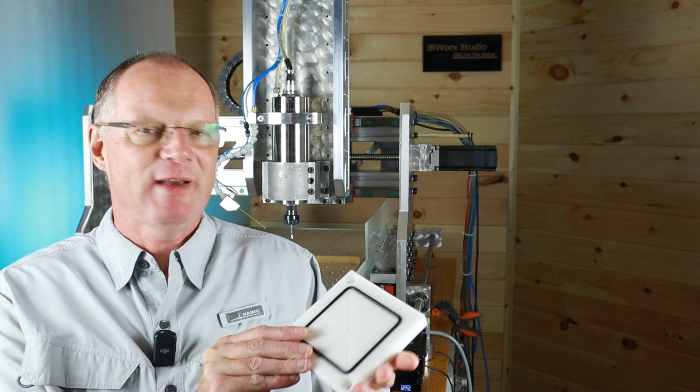I will make this vacuum pod today, and I'll show you how I make the CAM feature, and then on the machine I'll also show you how that looks. For example, we're going to make the bore, and I'll show you how the bore looks when we route it on the machine.

The plate is made of POM or Acetal, also called Delrin, and it machines very well if you use an O-flute bit. There are two different tools I use, and I'll leave you the links in the description.

Next, I have three really awesome tips. One, I'm going to show you how you can synchronize your view cube with your setup, so you don't have to fight that all the time. Second, I will show you how Fusion 360 can track the stock throughout your setups. And third, during simulation you never see a tool holder because there is no ER20 tool holder for our spindle in Fusion 360. But we can make one, and then it will notice when there is a collision, or it can notify you before you make a collision. Okay, let's get started.

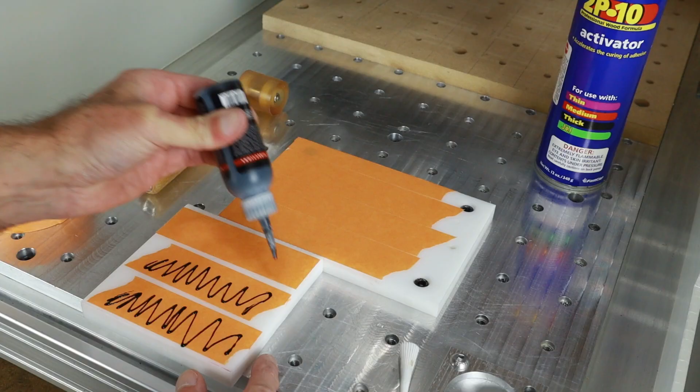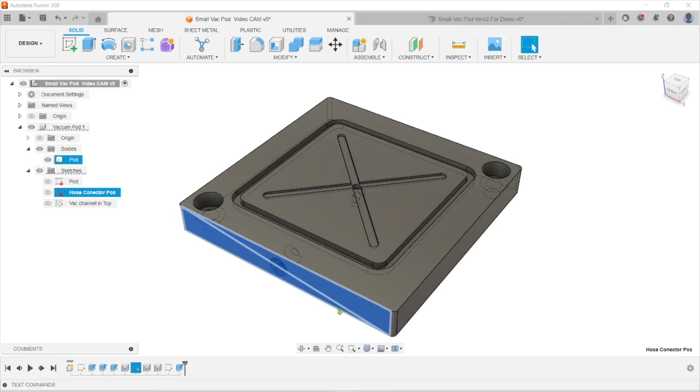Let's have a quick look at the model. So we just have one body, and then there's the vacuum pod itself, the drawing of that, or a sketch of that. Then the feature for the hose right here, which actually I'm not going to make in this CAM.

This is something I'm going to drill by hand. And then the vacuum channel itself right here. Then there's a center hole that you see here, and that center hole is also a portion of the CAM.

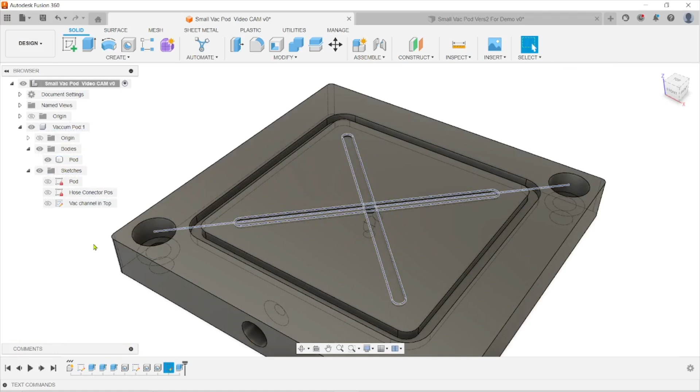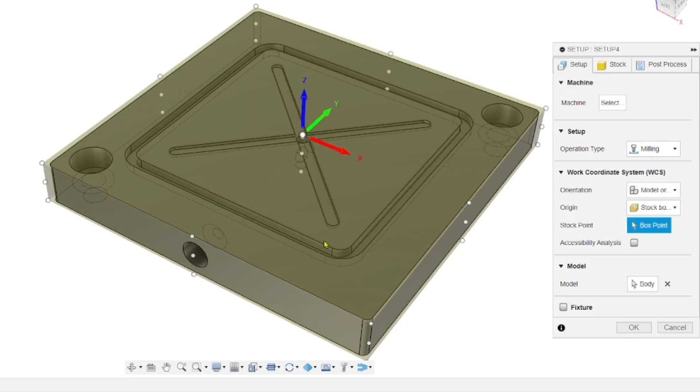Okay, next we need to go from design to manufacture. Setup, new setup. Default is that we have here the XYZ in the origin, in the center. And I like to place it at the bottom because that is where I zero out on the table. I don't zero out on the top of the part.

So the first challenge will be to put the coordinate system into the work coordinate system here, into the right place. So we have to use a view cube, turn the whole thing around, and then we'll see that we get it into the left-hand corner right here, the lower left-hand corner, this one.

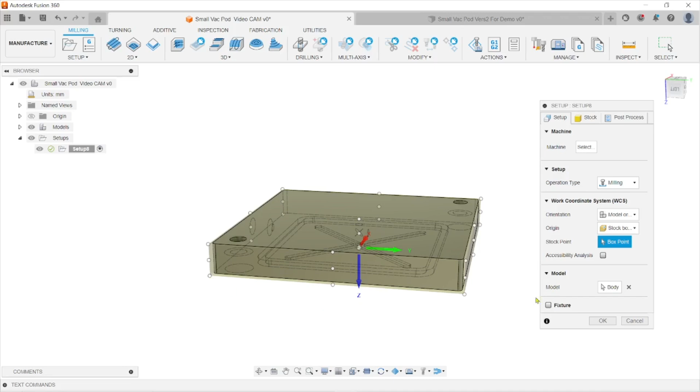So we have a stock box point right here selected, and I can select that now. I'm gonna for fun do it, but it's gonna move it around, but maybe that is also something to show. So we have here model orientation as for the work coordinate system, and that is wrong.

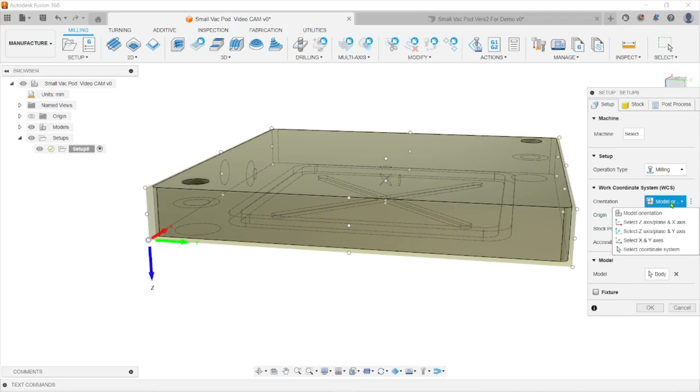We need to choose two axes. Actually, I like to select the X and Y axis so that I can choose the correct axis on the model itself. So it wants me to choose the X axis on my machine. It will be this line right here, and it moved it to the right hand corner. I ignore that for the moment, and now it wants to select the Y axis, and the Y axis is this one right here, this edge.

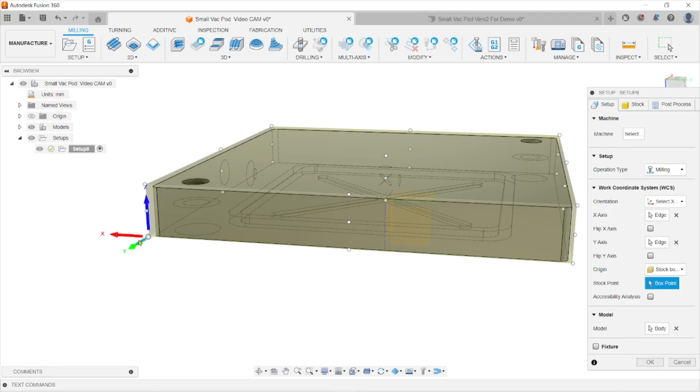The origin is the stock box point. The stock box point is correct, but now we need the correct point, and that is the lower left-hand side right here. And you can see it's still the wrong way. X and Y are correct. Z, as far as the axis goes, but it's the wrong direction.

So I can flip X by clicking on X. I can flip Z, and now I have it the way I need it. So X, Y, and Z, sometimes I just step at this until I have it the way I need it. And this is correct now. This is what we want.

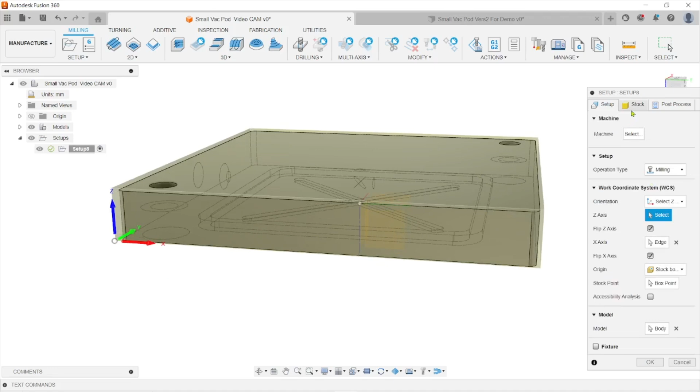Let's go to the stock. So we have a relative size box, that's default. By the way, you can change that default setting up here as well. But anyways, I'm going to have a fixed size box. And when we do the fixed size box, we usually round up to the nearest 10 millimeters.

So I'm going to right away set that to 0. I don't want to round anything. And I hit enter by accident. If you do that, just right click, edit one more time, back to stock. And the width is 124. The material is in the center, 124 for Y as well.

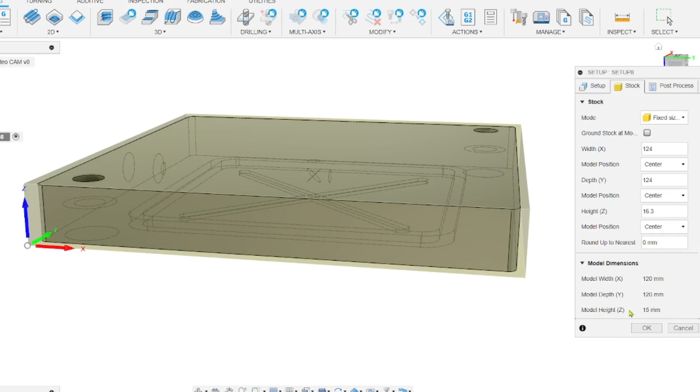And then it is 16.3 for the Z height, and also in the center. That is actually what we need to do on this tab. I'm going to click OK.

Now we can start with the first operation, which is to face this side off. Pay attention to the view cube up here - this is where I'm at right now. You will see that it is actually upside down, and it's going to make a problem. I'll show you a trick in a moment on how to fix it.

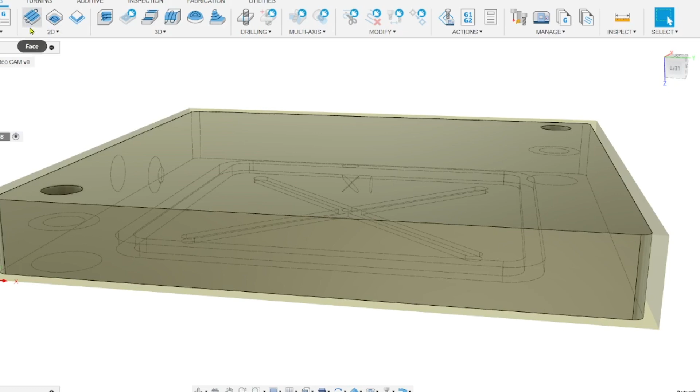Okay, so in 2D, there is a button right here for the facing operation. Let's hit that. The first thing you want to do is select a tool. I have a tool in the library already. On the right hand side you can select face mill as a filter, and these are the face mills that I have. There's an Amana tool that comes up - this is number 9. I'm going to select that.

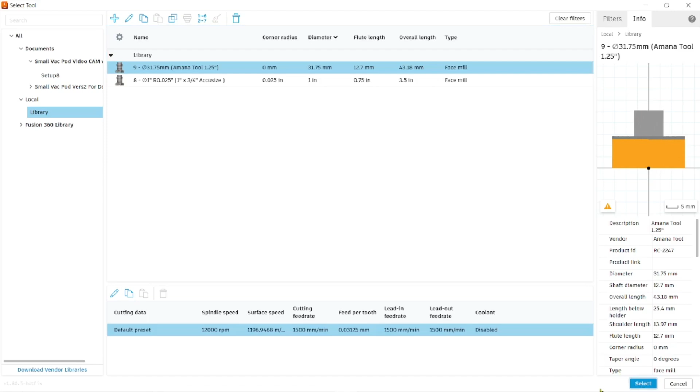There are some default settings down here, 12,000 RPM, 1.5 meters per minute. For plastic, that sounds right. So let's select this. Next we have the coolant disabled - that's correct, I just double check and glance. All of these values right now look good to me.

The geometry is something for the facing that Fusion is really good to know what that is. You don't really need to do anything with this tab. The heights, you could leave this.

I normally change all these values though, because 10 millimeters for the clearance height for the stock top, and then 5 millimeters for the retract height - that is just too much. So I'm going to do 5 millimeters for the clearance height, and then the retract height is going to be 3 millimeters. The feed height is going to be from the top height.

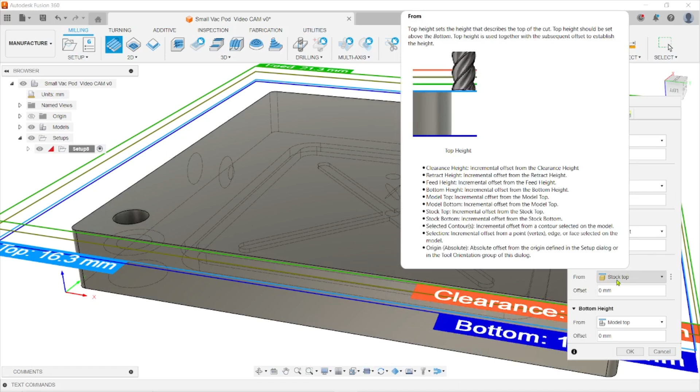Wait a minute, what is the top height? The top height is the stock top. Okay, I'm okay with that. So from the stock top, we're saying the feed height will be 5 millimeters. That's actually more like 2 millimeters.

And then the top height is the stock top, and the bottom height is your model top. That is also correct, because you can replace these two words that you get confused with. Top height and bottom height - replace them with 'where do you want to start your toolpath?' What is your starting point in the heights? Well, that's the stock top. And how far are you going to go down? Well, I'm going to go all the way down to the top of the model.

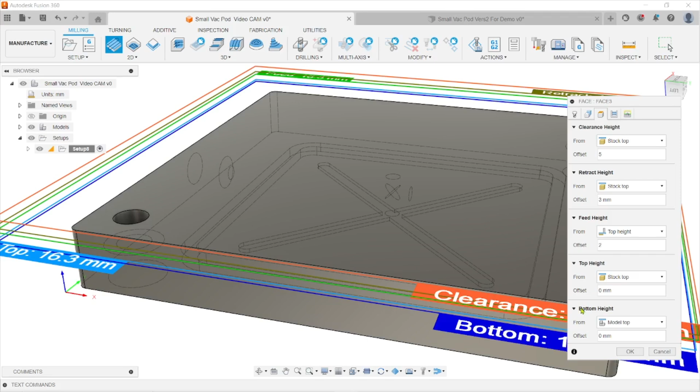And that it says right here, model top. Okay, then we have the passes, and I like to select a path direction reference. So I just click select, and the reference will be here, the y-axis. I like for the tool to go forward and backward in this direction so that it uses the stronger y-axis on my machine because it has 2 motors on it. So next it's going to go in both directions, both ways.

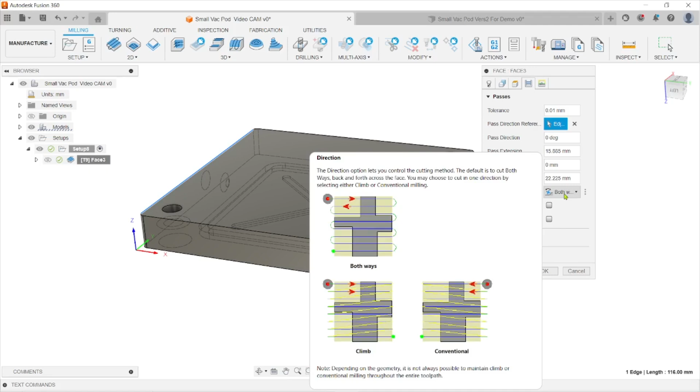That is correct. And I like to choose multiple depths. Now for this cut we don't need it, but I like to show you how to set up. I like to have a finishing step of 0.2 millimeter that I already put in here. The reason is that for the finishing tool itself, I always like a good surface, and the final step down with 0.2 millimeter is going to achieve that.

Now here we are only taking off about 0.6 millimeter altogether. It wouldn't make a difference, but I like to show you - let's say we make a 1 millimeter cut up front, and then I would follow up with a 0.2 millimeter. There's no stock to leave.

Next step is the linking, and there isn't really anything right here for this facing operation that we want to do or need to do. I'm going to click OK.

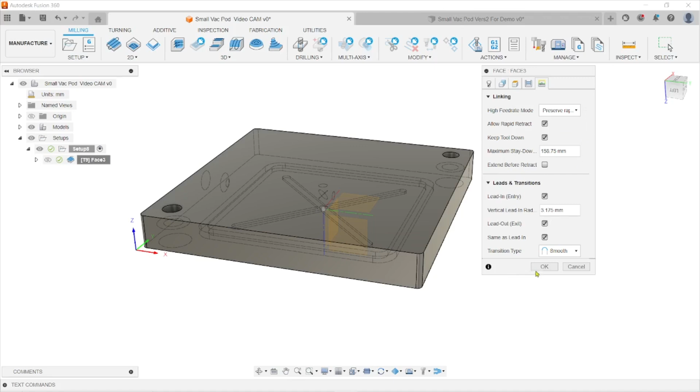All right, we start in the front left-hand side. I like it. Let's simulate this toolpath.

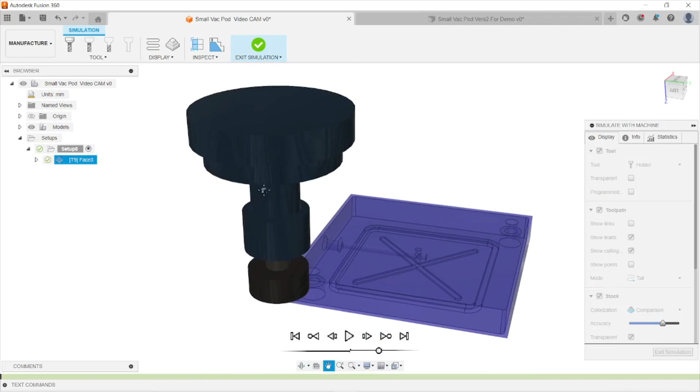And the first thing I like to show you is that there's probably something different on my screen than on yours. That is that I have the tool, but I also have the representation of my spindle right here. The reason for that is that the ER20 tool holder does not exist in Fusion. So I'm going to come back to that in a second.

Let's go ahead and simulate this. There we go. First pass and second pass.

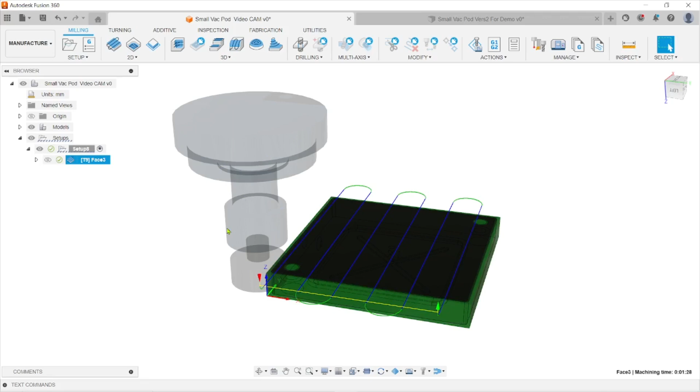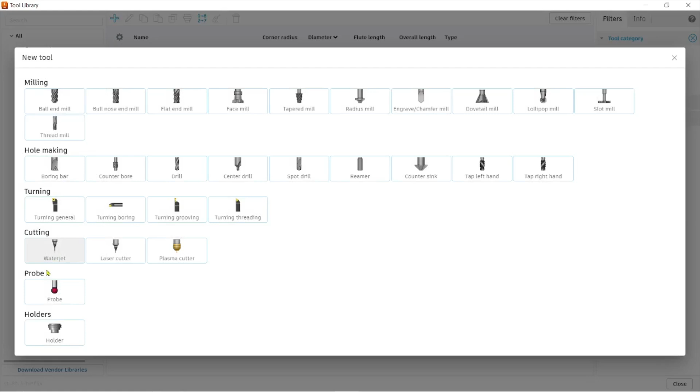I'm going to exit the simulation and show you how to add the ER20 collet. You go into your tool library up here, to your local library. I already have holders selected, but let's say that holder is not there yet. Then you say add up here, and now instead of adding a tool at the very bottom, you can add a holder. Let's say I'm going to add a holder.

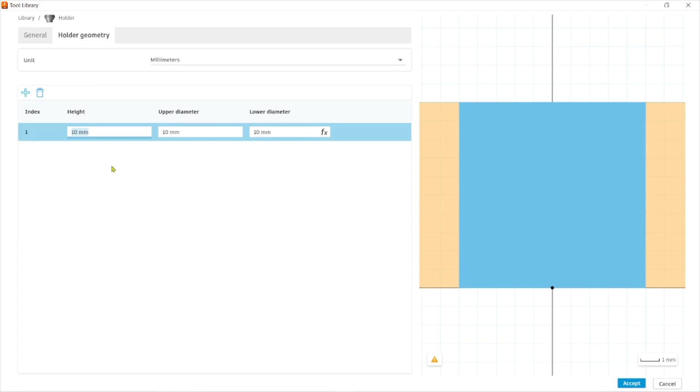So there's a general description. You could put in ER20 and so on. But then there's the holder geometry, and you see this is just empty. You would click plus right here, and then a field comes up. This field just represents X and Y directions with the diameters.

So I'm going to show you the holder that I have. That's this one right here. It's the ER collet and the holder geometry. There are 5 elements to making the drawing on the right hand side, and you can pause here if you like and then copy these values and just make your own.

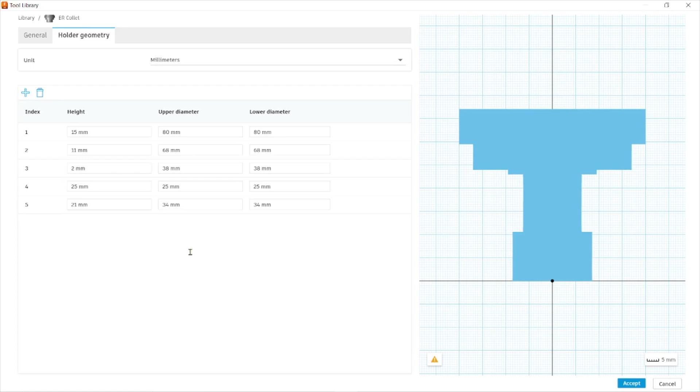I'm going to hit cancel and back up to the drawing. Let's simulate this, and we can see that we are down to the model because the model itself turned green, and we can see the stock left around it.

Next, we are going to face the top side in the very same manner. But therefore we need a new setup because our work coordinate system changes. So setup, new setup. I'm going to do the same thing one more time as in the last setup.

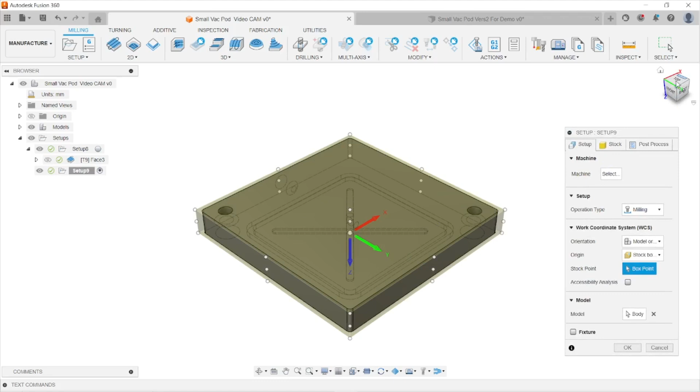We have to now turn the view cube up on the right hand side, turn the view cube around so that we are again in the bottom left hand corner. So the orientation is model orientation. Again, that's not quite right.

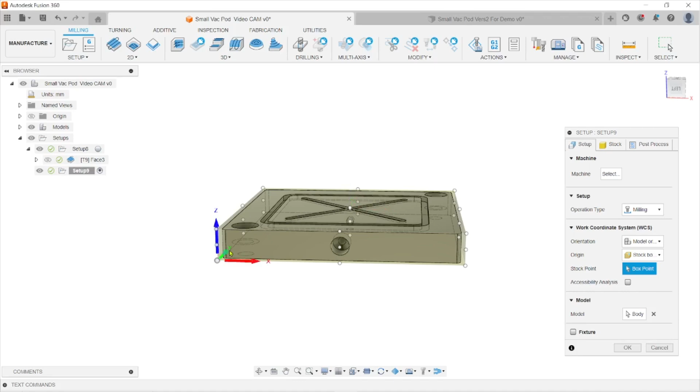Let's just see what happens if we use the box point. I'm going to select it, and Y and X and Z is this time right off the bat correct. So this is nice, and this is where we are going to have our work coordinate system anchored.

The stock here is one important selection, and that is from preceding setup. So that is what we want, a drop-down selection right here, and we need to check continue rest machining. So what does that do? Well, Fusion now already knows that at the bottom there is no stock anymore.

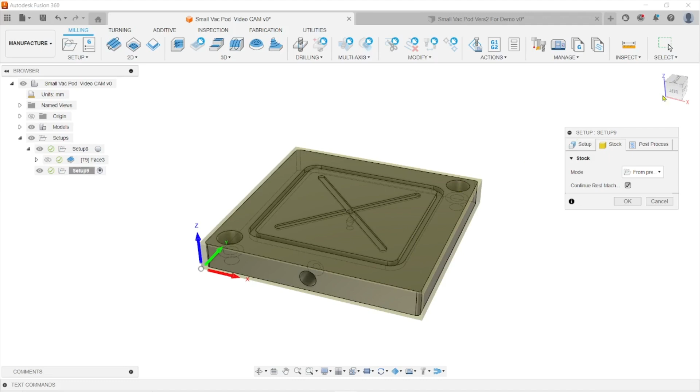We selected the stock box point, but of course we machine material off, so in the Z direction this has now been corrected. The stock and the model is at the same height at the bottom, and you can see when we zoom in that this one is darker and this one is lighter in color. So we are actually machining this off, and the stock box point is representing the correct point on the model.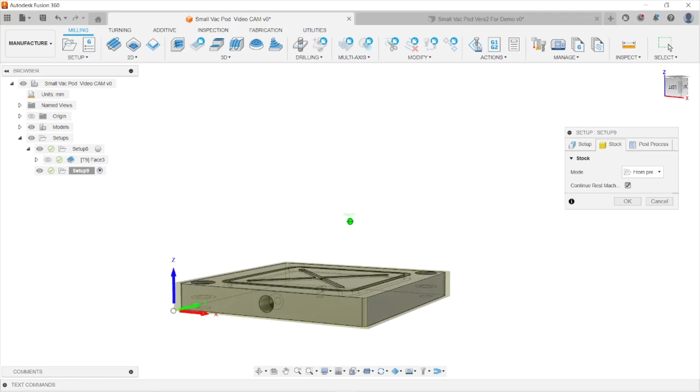Okay, so we already have the facing at the bottom, and that is easily replicated. All we have to do is right click, and then there are 2 options. One, we can say store as template. I'm not going to get into templates a whole lot, but templates are an awesome way, and I suggest you research that topic and also have templates for a different toolpath that you always implement when you reuse a certain toolpath. Today I'm not going to do that.

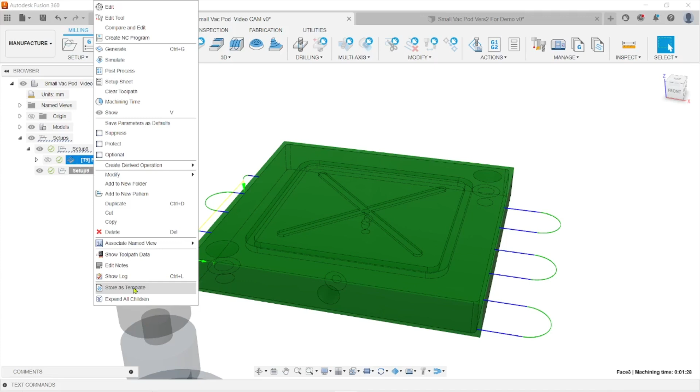I'm just going to say copy, and I'm going to be under setup 9, and say paste the toolpath. There it is.

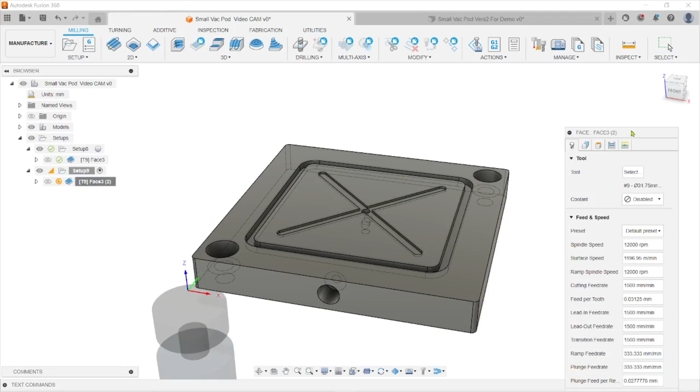I open now setup 9. There is the face, and of course the face represents the wrong orientation of the model and the wrong surface. The tool is correct, and all we have to do is go into the selection of the stock, and it automatically selected the top. That's all we have to do because the rest is already correct.

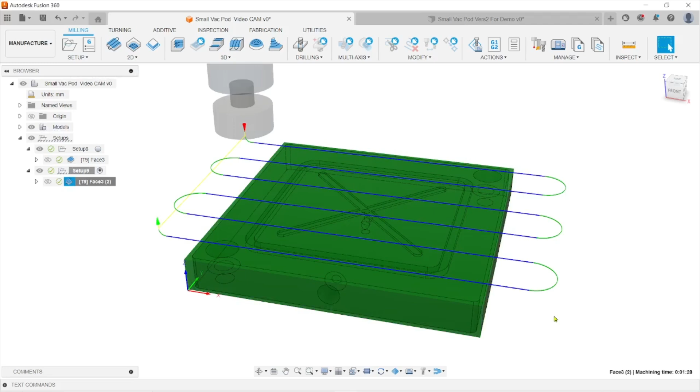And we can just say okay. This toolpath now should generate correctly. Well, it didn't. Dang, what happened? Here we have the orientation again the wrong way. Let me correct that. I don't like it to go in the X direction.

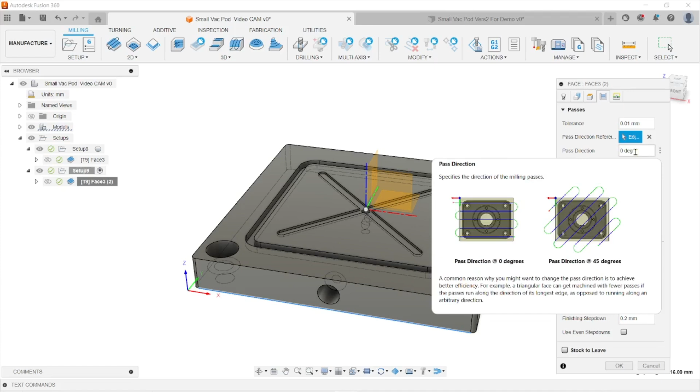I like it to go in the Y direction, as I told you before. So we need to go into passes, and either you change it from 0 degrees to 90 degrees, or you can just say pass direction reference, and I'm going to click the Y axis again, and I'm going to say okay. So when it regenerates this, now in our simulation it's going to go correctly.

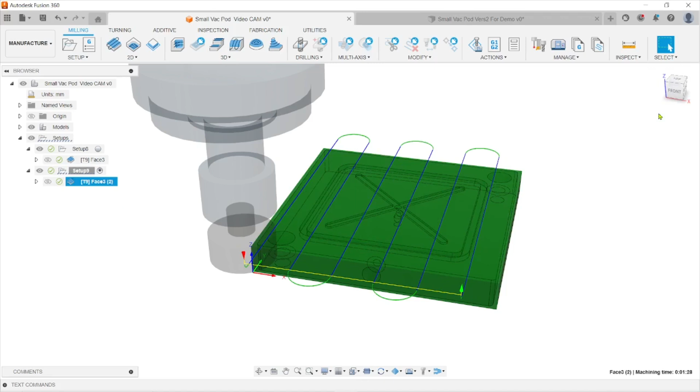So here comes the next tip that I have for you. If we have to change, look at the view cube here on the top right hand side. We have a home button. The home will be this right here. If I now go to setup 8 and activate that, and go home again, it flips it around.

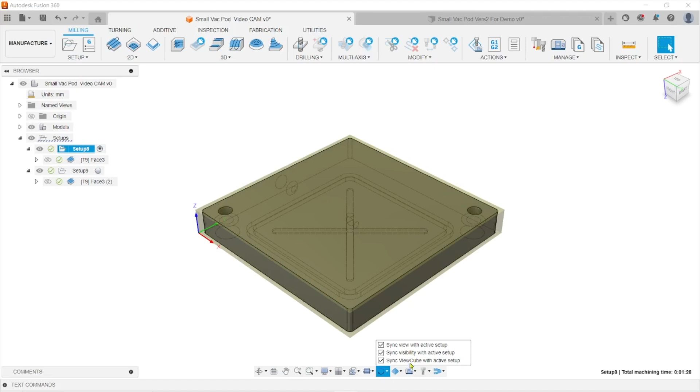Do you see that? That's only because I have synchronized view cube with active setup. Normally I have all 3 of these selected: sync view with active setup and sync view with the cube. That's so important because this darn thing flips around on you. Anytime you hit home, it's in the wrong orientation. It's very annoying, so this is one way to get around it.

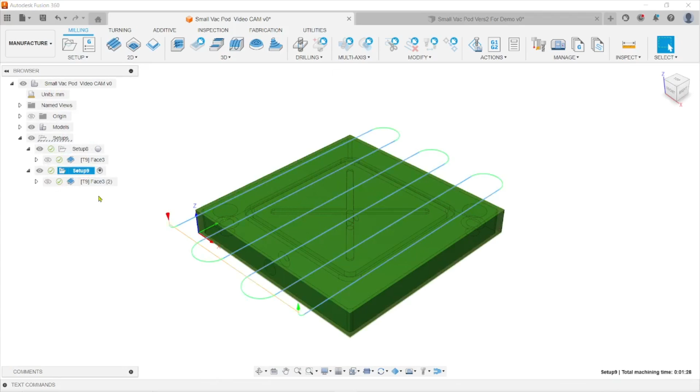So I strongly recommend that you choose that setup. All right, let's go back to setup 9 that I have here, the facing, and you see how it turned around. Nice.

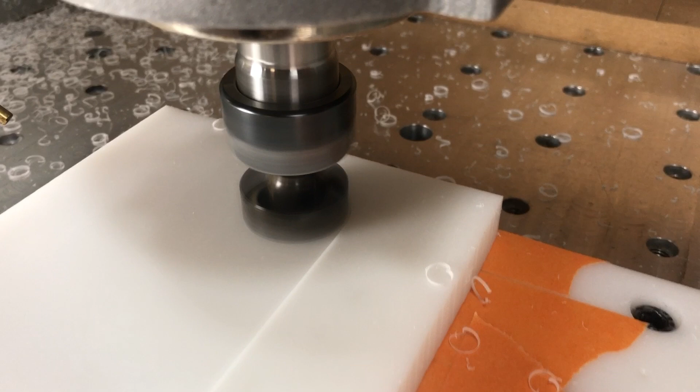The next thing that we need to do after the facing operation is the channel, the vacuum channels. So both of these channels are going to use the same tool, and therefore I'm going to combine them in the geometry because they are so similar.

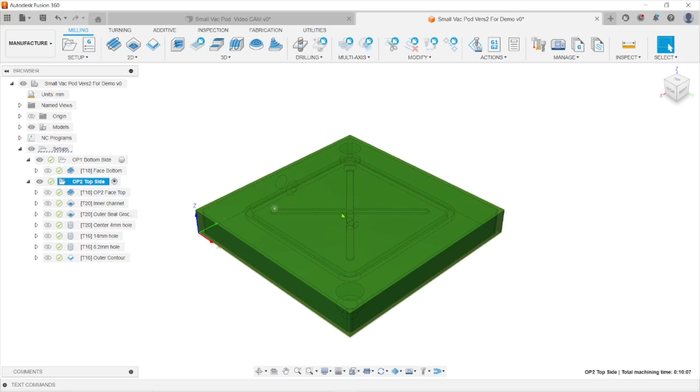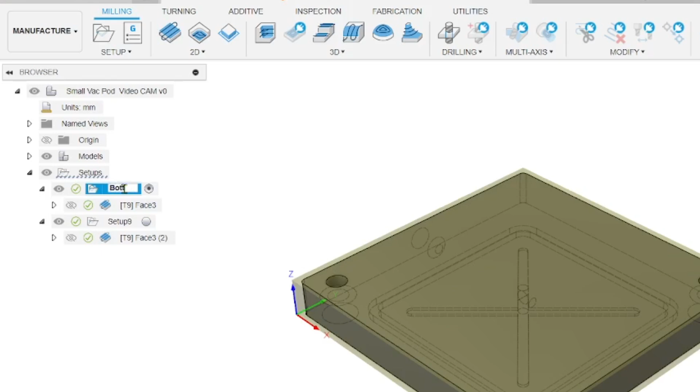But before we do that, I like to do some housekeeping here. We said this is setup 8 and setup 9, and face number 3, and this is just a copy of face number 3. All of that gets too confusing. So what was the first setup? Well, it was the bottom, right? Let's call it bottom. That's just some housekeeping. And the face, which face was that? Well, it's the bottom face.

And setup number 9 here for me, this would be the top. And the facing operation would be the top face. That will make everything so much easier later on.

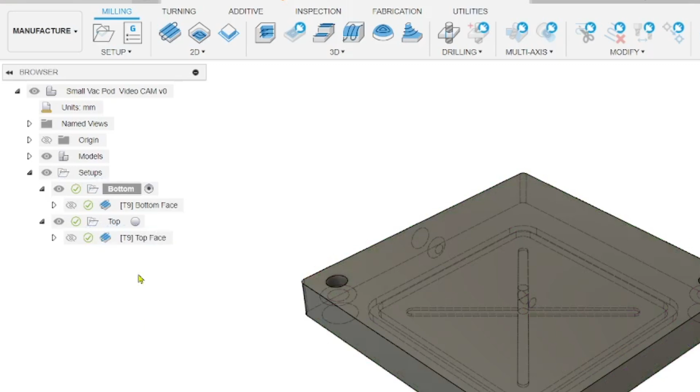All right, let's create another 2D toolpath. We need a 2D pocket. It does not need to be adaptive clearing. Oops, need to select the right side one more time. 2D pocket. Good. So the tool is the facing tool.

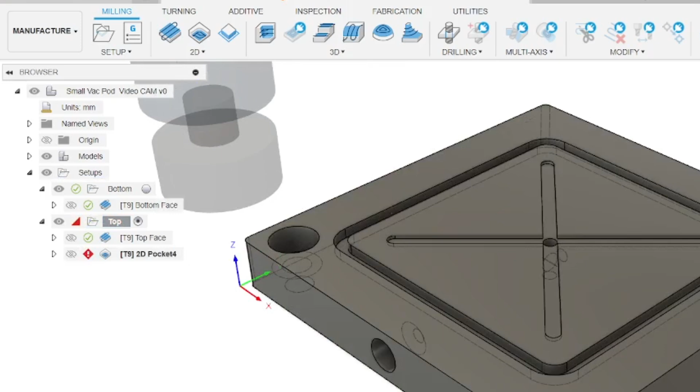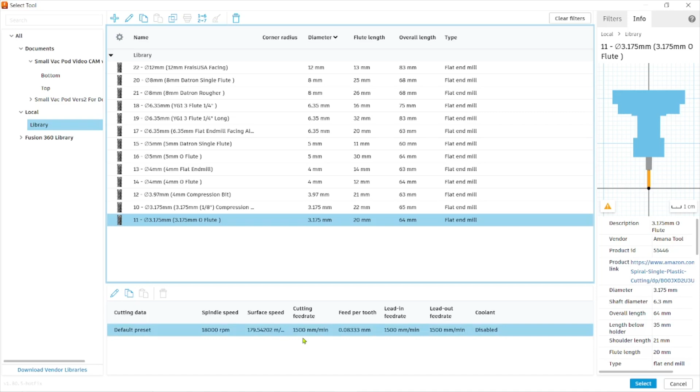We need to select the right tool. I go to my local library. I'm going to choose flat end mill as a filter. And I have here an 1/8 of an inch flat end mill, 3.175. One is a compression bit, the other one is an O-flute. So the O-flute is the one that I'm going to choose. I'm going to double check here, 18,000 RPM, 1.5 meters per minute. Hey, that sounds pretty good.

We can use that. In the geometry tab, we now need to select the geometry. Here's one thing I like you to pay attention to: if you select the top geometry in the heights tab, you have to tell it how far you want to go down. So you have to know the depth of the pocket, but there's a way around it. If you choose the pocket itself, or the floor of the pocket on this one, and then also on this one, the nice thing will be that the depth is already predetermined, so we don't have to worry about it.

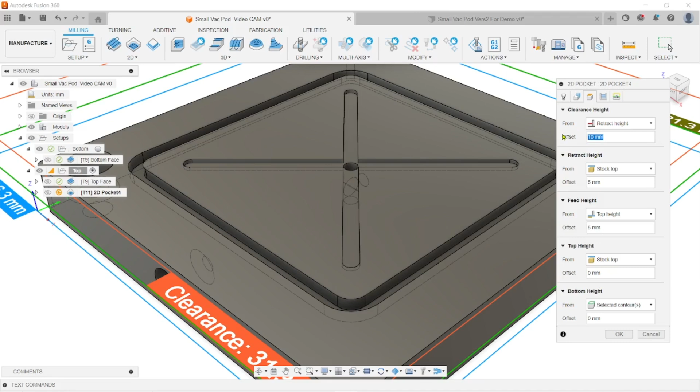Okay, the heights. All right, I'm going to do the same thing. So the clearance heights here, let me just run through that pretty quick and then I'll be right back. Okay, for me it's 5, 3, and 2 millimeters. The top height is stock top. That is correct because we still have stock on the top. No, we don't—it's not correct because the top height is the model top. We already cleaned that off. All right, let's choose model top, offset 0.

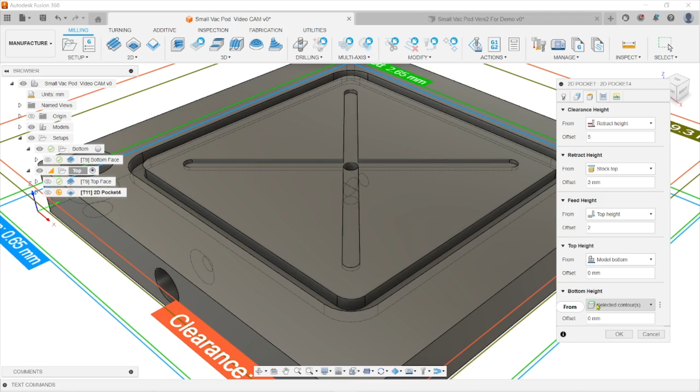I like to click multiple depth, and then we're going to say what is the maximum roughing step down. It's a 3 millimeter tool, or 3.175 actually. So let's say half the diameter is 1.5 millimeter, and that's what I'm going to select right here. That's a safe value, 1.5 millimeter.

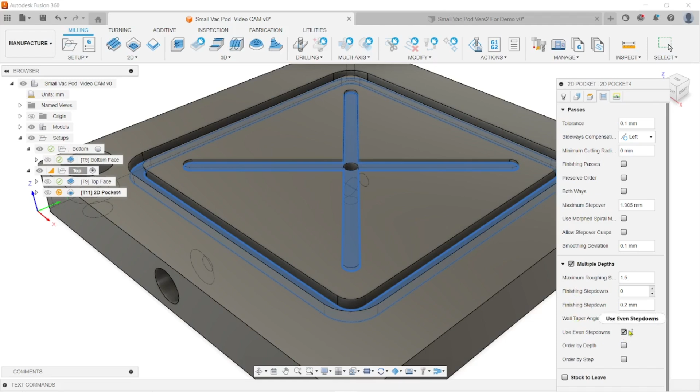I have a finishing step down. Actually on the channel, I don't care, I don't need one. The rest here, even step downs, yes that is good. And I think the step over here is 1.9 millimeter. I'm okay with that as well.

Let's go to the linking tab. Here on top, I need to change my safe distance because I changed the heights in the heights tab, and I changed it to 2 millimeters. And then in the lead-ins or leads and transitions, I leave everything as is.

Now here in the ramp, there's helix selected. That doesn't work. With a 3 millimeter tool and a 4 millimeter channel, how do you plan on putting a helix in here? That won't work. So we need to choose zigzag.

And the ramp angle is going to be 5 degrees, and a maximum step down of 2 on the ramp step down is 2 millimeters. I don't know how that actually works with the maximum tool step down of 1.5 for the pass, but I think I'm going to choose 2 right here. And the ramp clearance, that's going to be 1.5 millimeter. All of that should work.

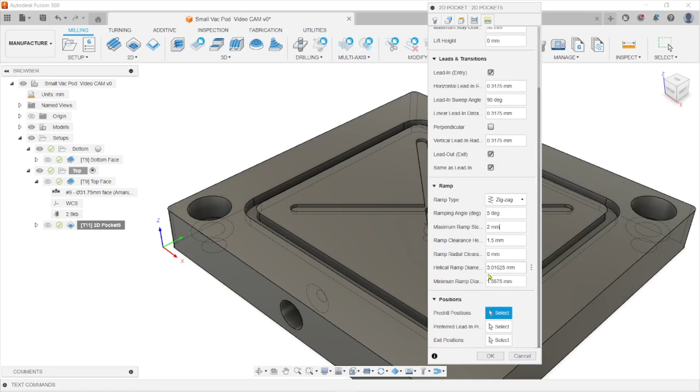Let's scroll down. Did I forget anything? No, I don't think so. That's it. Let's click OK and see if we can simulate this.

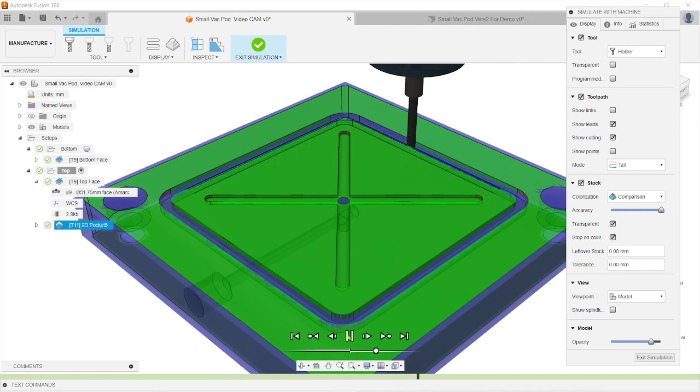Here's our zigzag. And then we turn green on all of the surfaces that are already finished. And there's the outer channel, zigzag in. First the inside towards the inside square, then it comes back towards the outside. That's also why it is going in one direction and then in the other direction. Okay, so that works, and that is our channel.

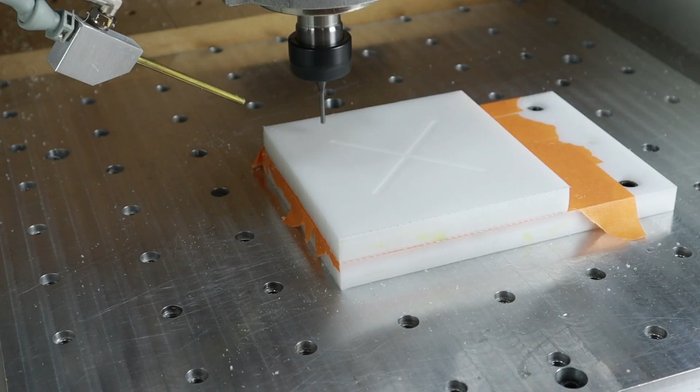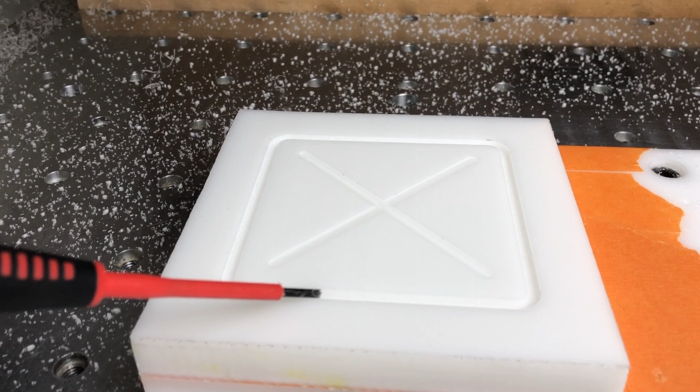So here is absolutely no burr or fuzz on the plastic. So that cut came out really nice.

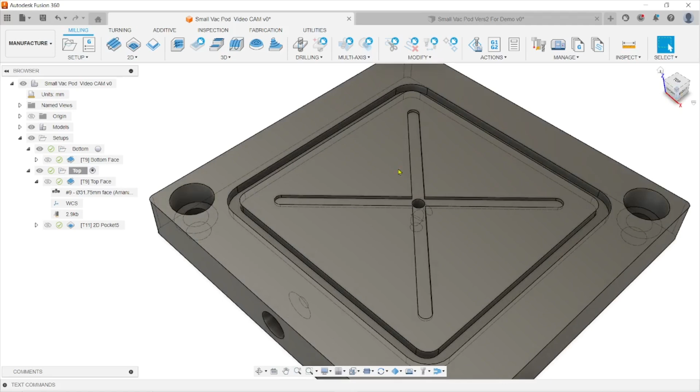Left with the same tool would be to create a 4 millimeter vacuum hole right in the center that you see here. But this is a bore function, and we also have the bore functions on the outside, so we don't need to make this video any longer than necessary. And I will show you the bore function making those M8 holes right here.

2D bore. And we're going to do the top portion first. That is important. So we already clear some material out, and we're going to select same diameter, and it's going to choose both of the top portions.

Heights, well, it's going to be from the stock top, the clearance. We can say model top here again, because the stock top is already gone. And I'll choose always 5 millimeter. The retract height is from the model top, 3 millimeters, and the top height is from the hole top 0. That is correct. And the bottom height is the hole bottom. That's also correct.

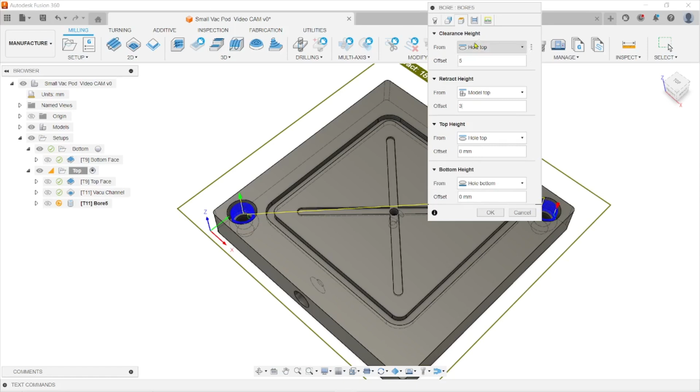Passes is a bit more interesting. There's no stock to leave, that's important. The angle here is 2 degrees. We can change that to 4 degrees right away, and that's still conservative. You can use more if you want to.

We need to select multiple passes so that we don't leave a section in the center. Number of stepovers is going to be 2, and it's 2.5 millimeter. Remember, we have now a 5 millimeter tool. That would be half the diameter.

I'm okay with that. We need to click finishing pass. That is important when we have a bore function, because I think sometimes the interpolation of the bore is not quite as good, so that the bore diameter is correct and round. I'm going to check that, and I'm going to say 0.5 millimeter. We can make that smaller at 0.2. That will also work. Let's select 0.2, and we have a climb cut.

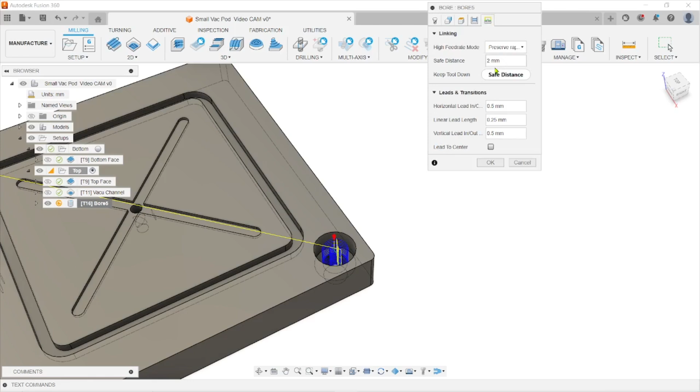Okay, there is nothing here that I'm going to change in the linking. I'm going to click OK. When we zoom into the hole now, you can already see that that inner diameter right here will not leave anything in the center, and that is important.

So let's simulate this now. My computer is doing something in the background, and I have the other file open as well, so this might not work as well. Yeah, that is done.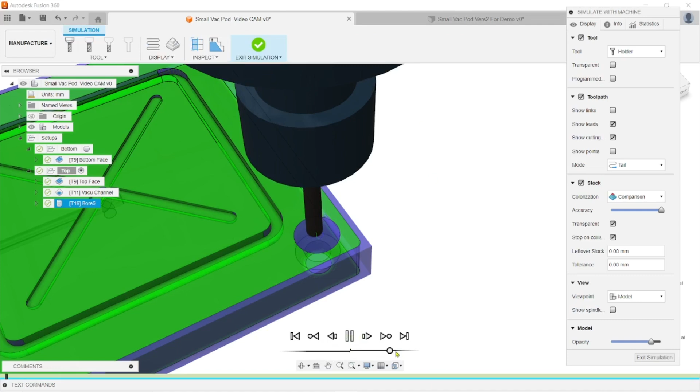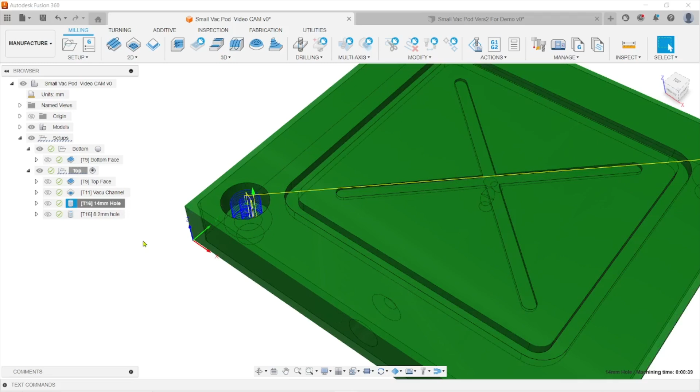Of course, I didn't record the last section, but what I did is basically the same thing for the lower portion of that hole. I duplicated the upper toolpath—right click, say duplicate, and paste that in. Now, be careful when you duplicate a toolpath: make sure the starting point for this lower hole is different from the other one. So in the heights tab, pay attention to where everything is.

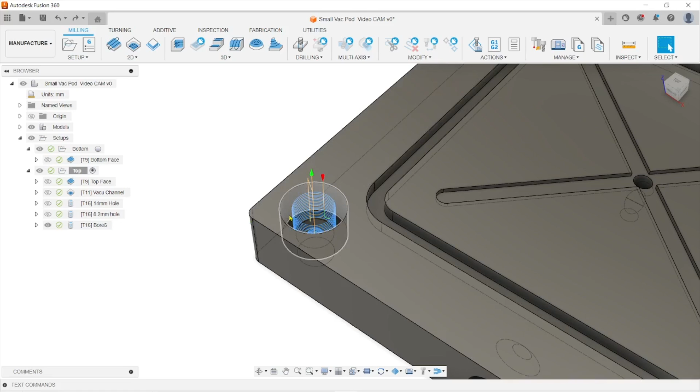An alternate way of creating the step bore, both of these diameters, is to select them at once, and that's what I've done here. Instead of separating them out and selecting the upper one then the lower one, I selected both of these at the same time. Let's see in our actual cutting how that is going to look.

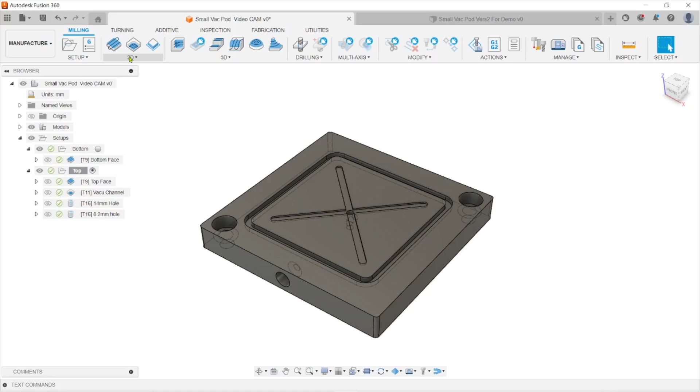Now left to do is the outer perimeter, and we're going to do that by 2D contour. Select the bottom contour again, that's important. There's a little red arrow, it needs to be on the outside. The tool is going to remain the same. The heights, I'm going to run through that just like we did before.

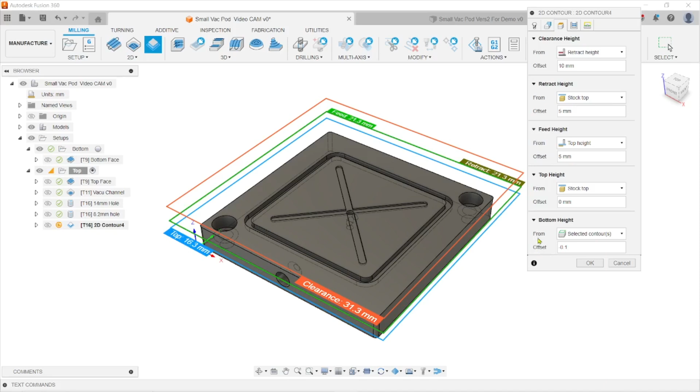The only thing I'd like to point out on the bottom height: if you want to make sure you go all the way through, and I have that glued down on the table with tape, I'm going to select an offset of negative 0.1 millimeter. And in the passes tab, there's a bit more meat here. There's a finishing overlap I like to use of 1 millimeter, and that makes sure that the finishing point is offset by 1 millimeter from the starting point—we overrun that by 1 millimeter so we don't have a mark on the outside.

We do need roughing passes because the outside perimeter is made on a bandsaw and I don't know really what that dimension is very good. So for maximum step over, I want to choose half the diameter of the tool—here about 2.5 millimeter or 2 millimeter. Let's say 2.5 millimeter. There's a smoothing deviation of 0.1. Number of step overs: 2.

We do need multiple depths—I'm not going to do that cut in one pass. The part here is now 15 millimeters, and I think with a 5 millimeter tool we can go maybe 3 step downs. That would be 5 millimeter, but I'm going to choose a little bit more—5.5 is the maximum roughing that we allow, and it will then calculate what it can do.

There is no finishing step down, no wall taper angle. The approach will be along the wall. Rough final, that should be it here. There is no stock to leave—make sure that that is in. Smoothing is always good because we have a radius here on the outside.

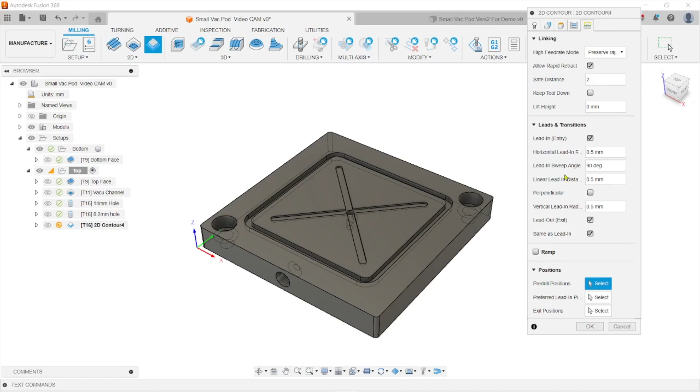On the linking, there's a safe distance I need to change—I knew that was going to happen. So it's 2 millimeters. Lead-ins, transitions, and everything here I'm going to leave as is.

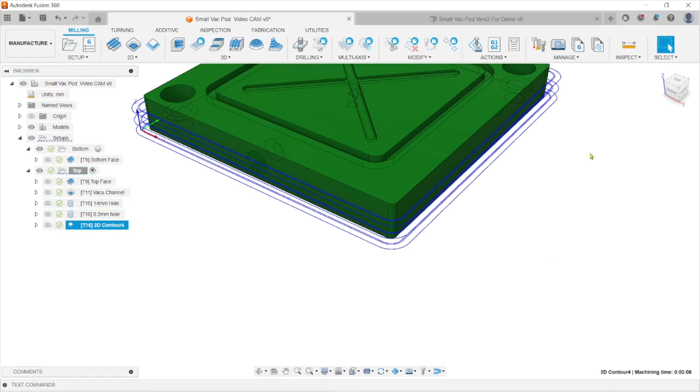So now we can see that we are having several passes here, and it makes the finishing pass on every single step down. If you don't like that, you can make the finishing pass a last pass going once around, but I'm going to leave it as is. It's going to gallop around the outside a bit more than you need—you can make that cut more aggressive, but my tool sticks out a bit, so I'm going to play safe and let it run around one more time.

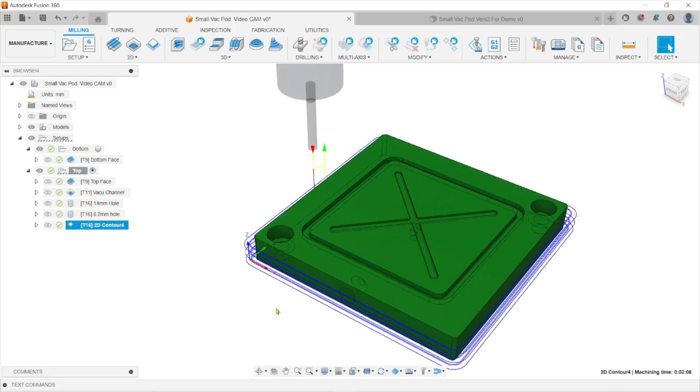Okay, let's simulate this. And now let's have a look at how this looks when we actually cut it out.